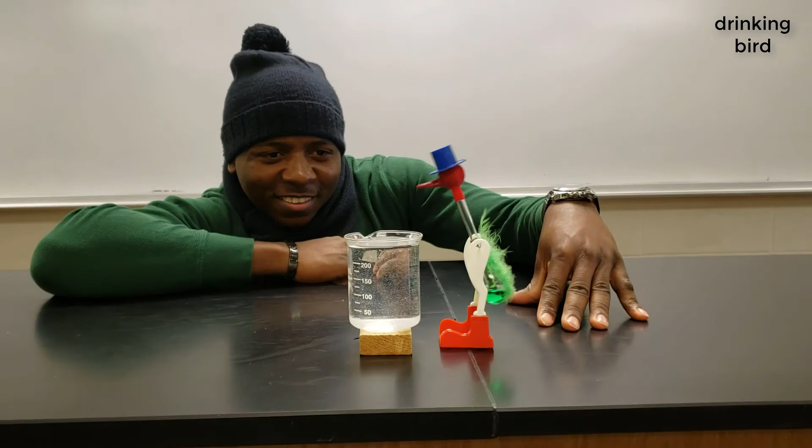What do all the following have in common? This drinking bird. This Hero's engine that I made. This thermoelectric generator that is powered by the temperature difference between these two cups of water.

This simple laboratory engine. This model steam engine. This Stirling engine, powered by the heat from my hand.

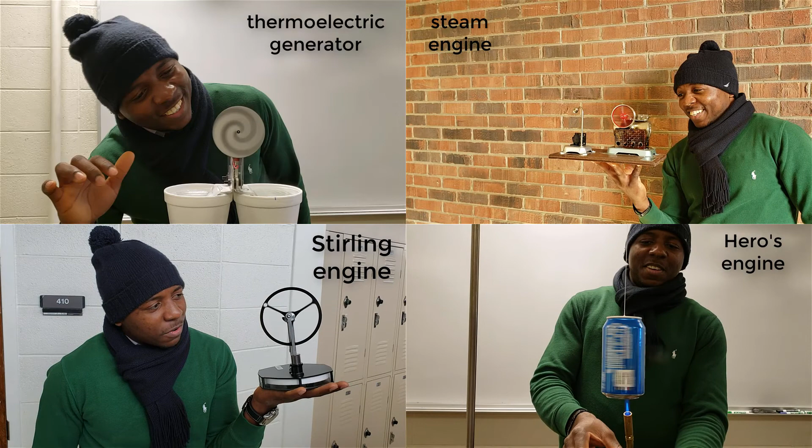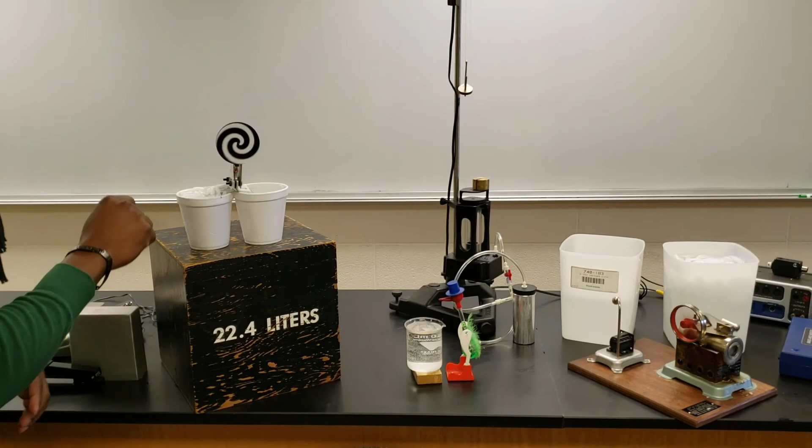What do they all have in common? They all run on heat, and any device that does work for us and runs on heat is called a heat engine. There are many other examples.

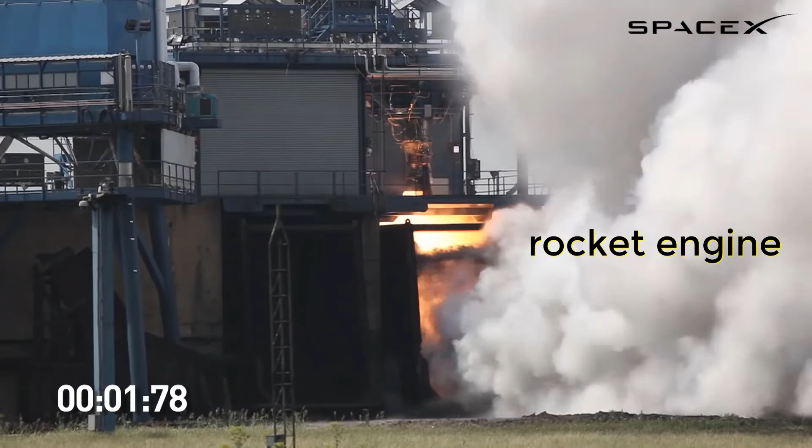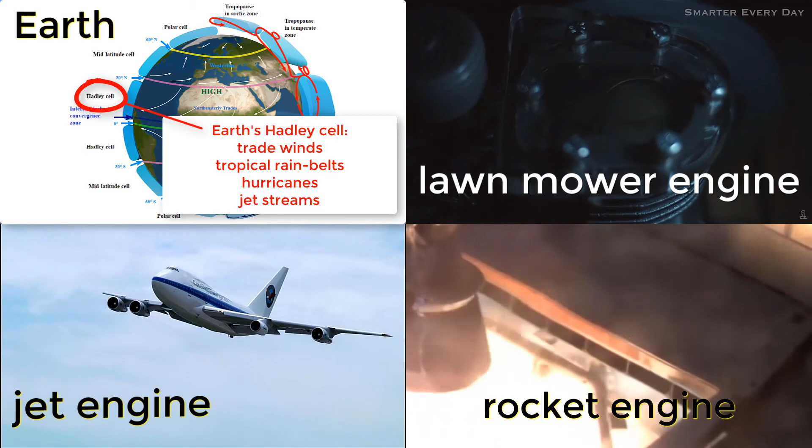The sources of the heat that power the heat engines are critically important. They fall into two basic categories, non-renewable and renewable. Non-renewable sources are removed from the earth, for example, coal, petroleum, and natural gas, and burned to create heat. The negative health and environmental impact of using non-renewable energy are obvious.

Renewable sources are not removed from the earth and are not burned. For example, solar, hydro, and wind energy.

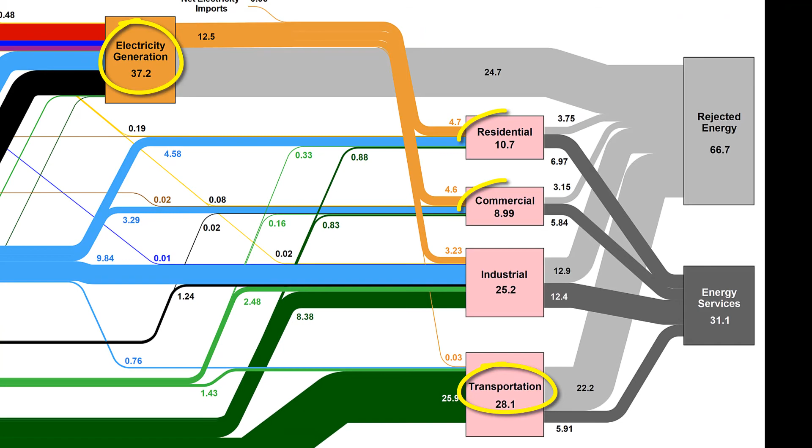This really colorful graph from the Lawrence Livermore National Laboratory might be my favorite chart ever. Notice that the three thickest lines represent non-renewable fossil fuel. The heat they produce when burned is primarily used to generate electricity, to power vehicles, to warm buildings, and for various industrial processes. Also notice that renewable energy sources such as solar, hydro, and wind make up about 6% of the US's total energy supply.

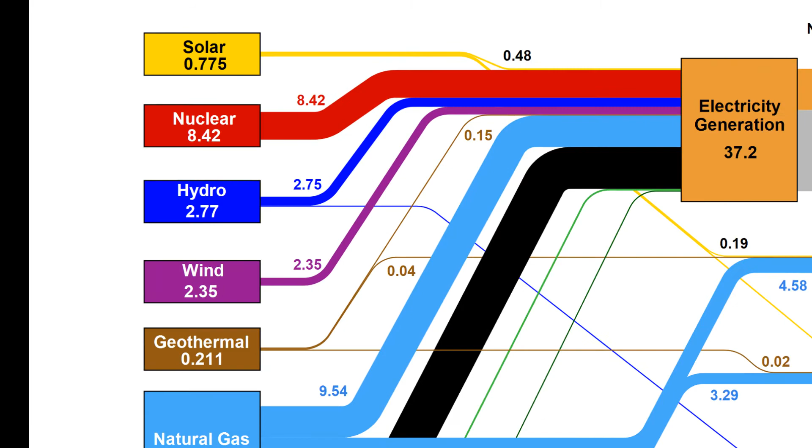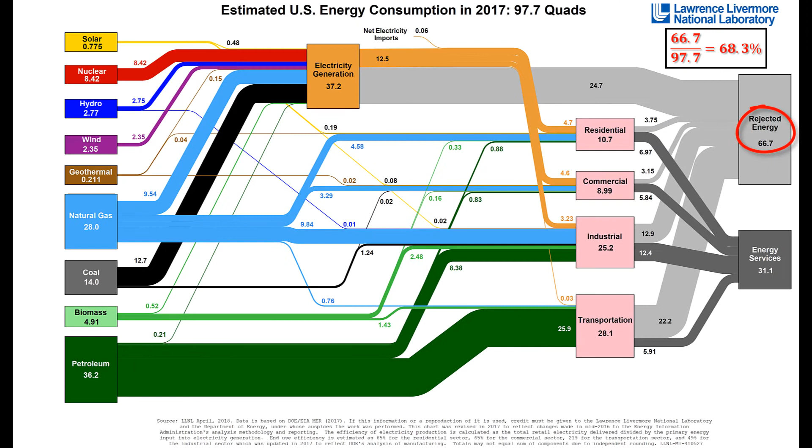This number is growing, but a lot more science and engineering is needed. One really interesting number to look at is the amount of rejected energy, which in 2017 was approximately 68% of the total. Think about it. More than two-thirds of the energy generated in the United States in 2017 was lost, mostly in the form of wasted heat. Some heat must be lost according to the second law of thermodynamics, but not two-thirds of it.

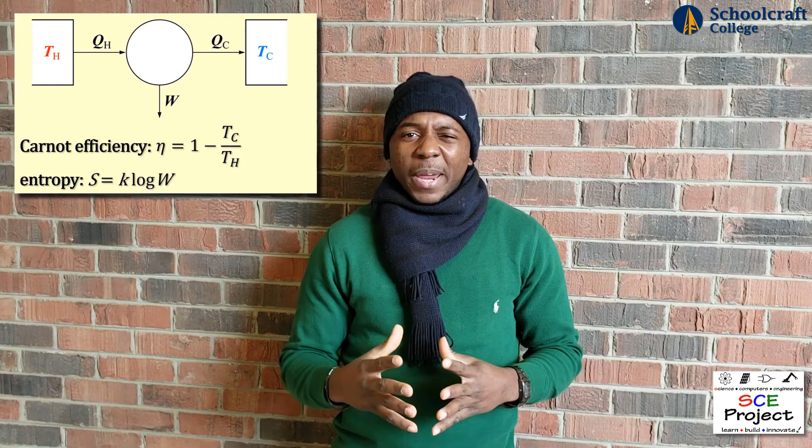This is where scientists and engineers come in. We need to make energy production and consumption cleaner and more efficient. We also need to help figure out a way to overcome the current barriers to widespread clean energy adoption.

This is why I'm showcasing Stirling engines. They are simple, have some interesting commercial applications, run on air, produce zero emissions, and provide a great window into a lot of science that is common to all heat engines.

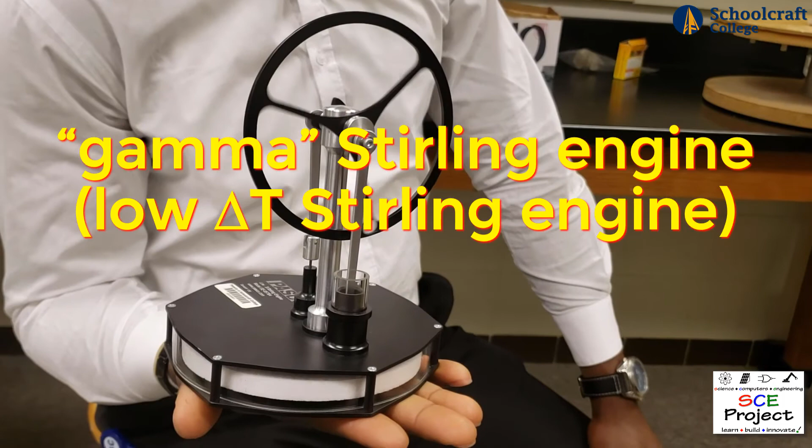This is a gamma type Stirling engine, which is also known as a low delta T Stirling engine. Delta means difference and T refers to the temperature, so this engine runs because of a really small temperature difference. In this case, the temperature difference between my hand and the surrounding air.

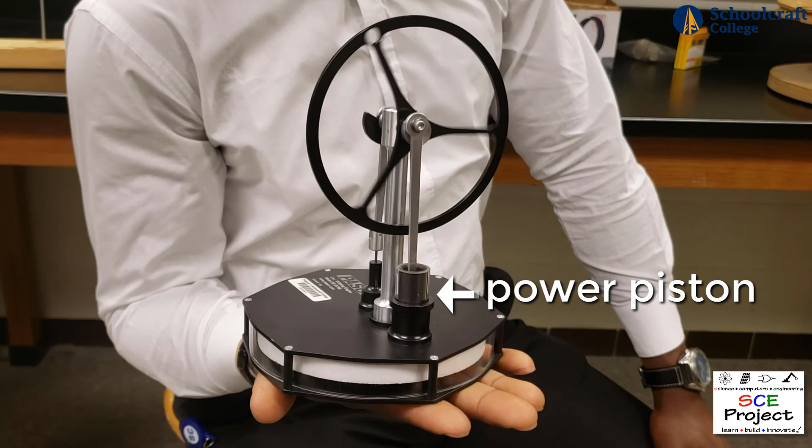A gamma type Stirling engine has two cylinders. This is the power piston, which fits snugly within this cylinder, and this is the loose fitting displacer, which repetitively circulates the air inside. The power piston and displacer share a common volume of air.

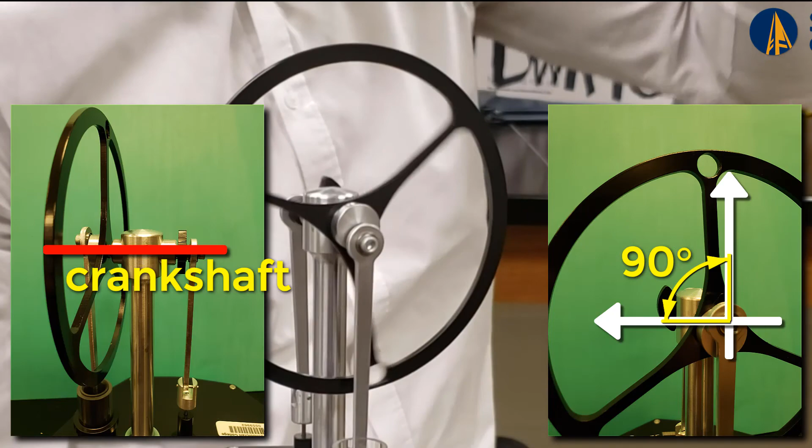They are connected 90 degrees out of phase with each other via a crankshaft with a flywheel. The flywheel's rotational inertia makes the engine run smoothly. Without it, there would be sharp power spikes followed by weak intervals.

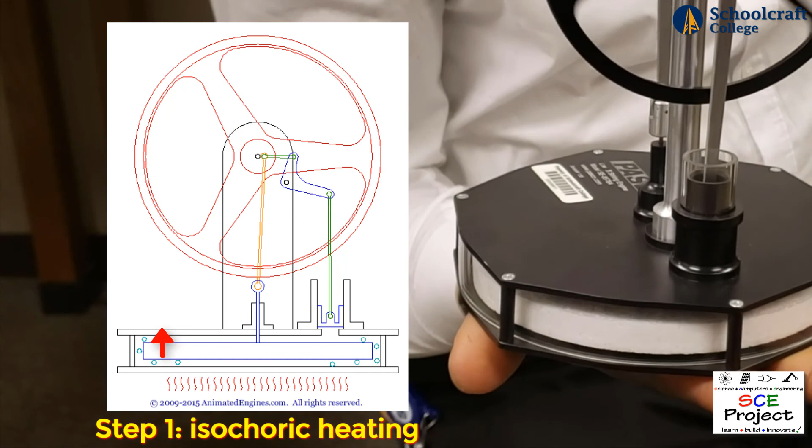Let's go through each step in one cycle. Step 1: the displacer rises, forcing air to the warm heat exchanger at the bottom. This is called isochoric heating.

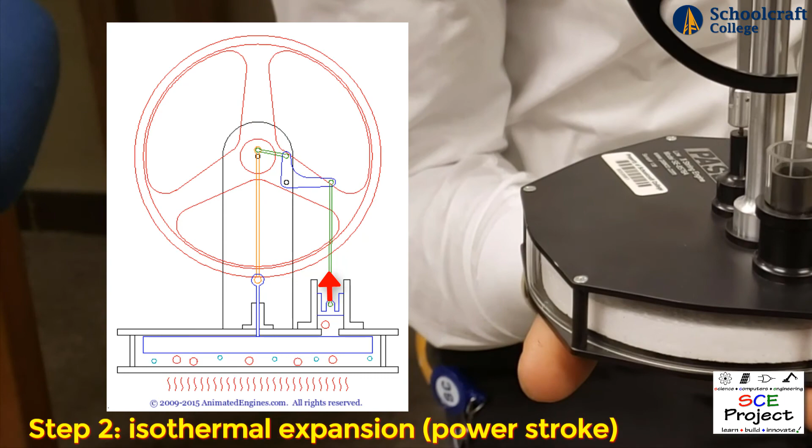Step 2: heat enters the air, causing it to expand. The power piston moves upward. This is called isothermal expansion. This is also the power stroke. It is where the engine is doing real work for us.

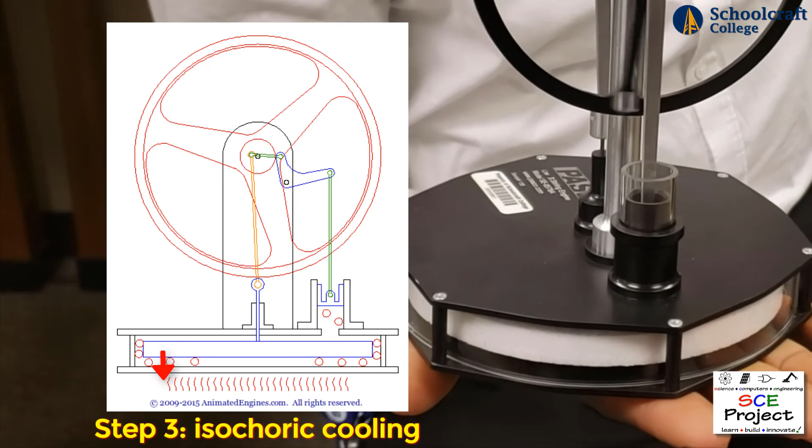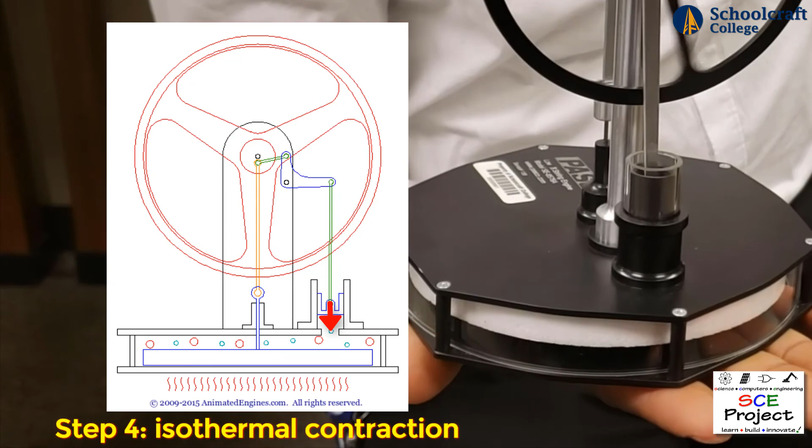Step 3: the displacer descends, forcing the warm air to the cold heat exchanger at the top. This is called isochoric cooling. Step 4: heat leaves the air, causing it to contract. The power piston moves downward. This is called isothermal contraction. The engine is back to where it started.

This flywheel plays a critical role. Its rotational inertia helps the engine move from one step to the next and provides a smoothing influence. Without it, the engine will run much rougher. That's it. This cycle is repeated over and over again.

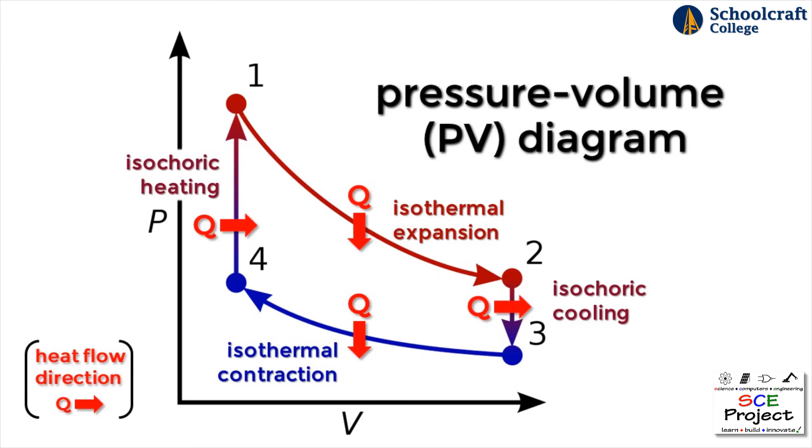This graph, called a PV diagram, shows how pressure, volume, and temperature change during the idealized Stirling cycle and where heat enters and leaves the system. Here are the four steps I just outlined.

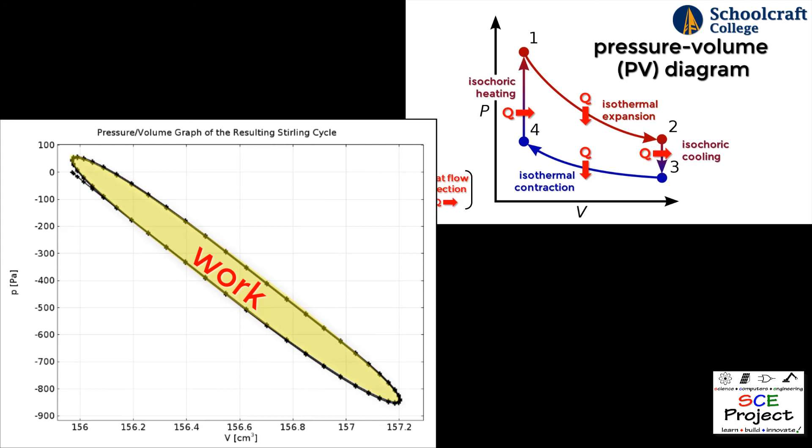This graph shows a more realistic PV diagram. The shaded area represents work done by the engine. The greater the shaded area, the greater the work output.

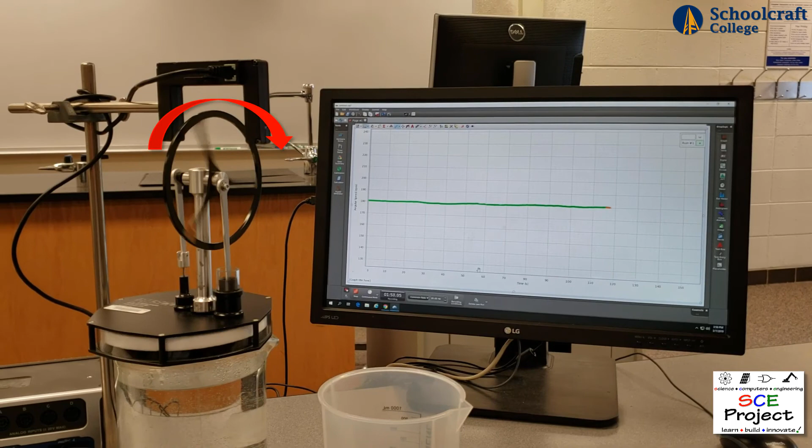Here's my Stirling engine running on top of a beaker of warm water. Notice that it is spinning clockwise. I'm measuring its revolution per minute with this motion sensor. Watch what happens when I put some ice cubes on the top plate.

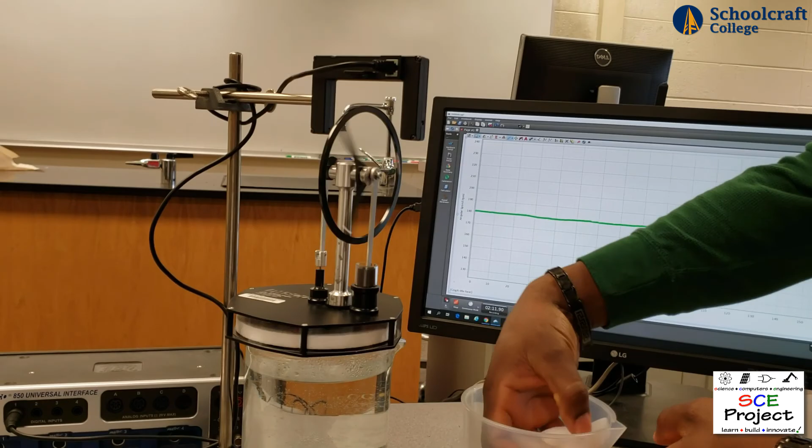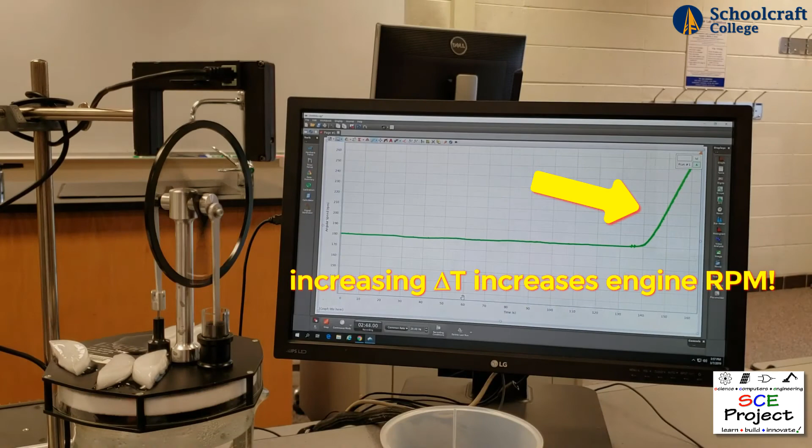All of a sudden, the temperature difference increases, and so does my engine's RPM. Now watch what happens when I reverse things by making the bottom plate the cooler heat exchanger by placing the engine on this plate of snow. Instead of spinning clockwise, it is now spinning counterclockwise.

Stirling engines have been around since 1816 and are now gaining interest as part of the sustainable energy movement. They can be powered by many different clean heat sources, like passive solar and geothermal. They can also capture waste heat from automobiles, homes, and industrial processes.

The more we learn about the science and engineering of heat engines, the more we can make them cleaner and more efficient. The Stirling engine provides a great learning opportunity in this area. I hope you enjoyed this video and thanks for watching.